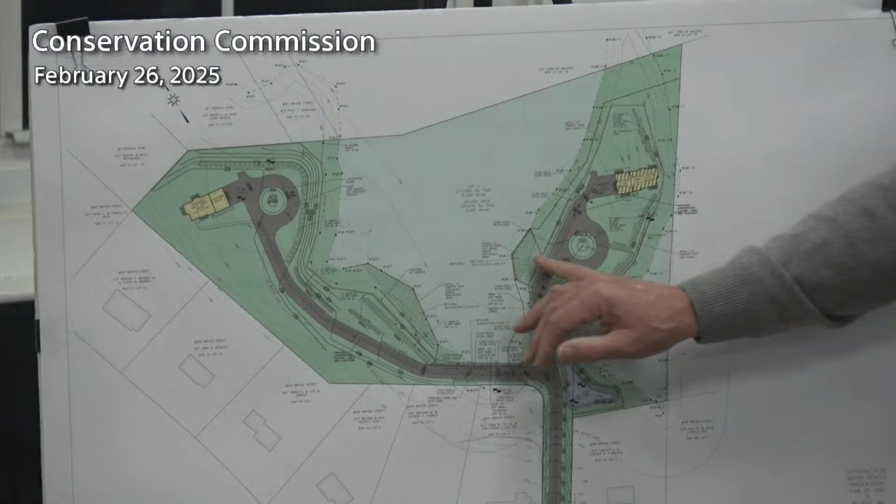There's about 950, a little less than 1,000 square feet of wetlands right here that is altered as part of this Lot 2 development. But both lots have replication areas right near the alteration area.

So I think that's about it. I think Landis might have a few comments for you, but whatever needs to be done, we intend to do it to get this approved.

Do you want to go over the new replication plan that you provided us? The plantings - yeah, I think we just added more plantings, right?

Do you want me to? I don't really get involved so much with the actual details of this stuff - other than telling the draftsman to put the plantings on in accordance with what the conservation agent recommended.

So that would be, unless you want me to start counting... No, it's just, what page is it on? A different sheet than you had before. We added a fourth sheet because there was a lot, so we added just a sheet devoted to construction period.

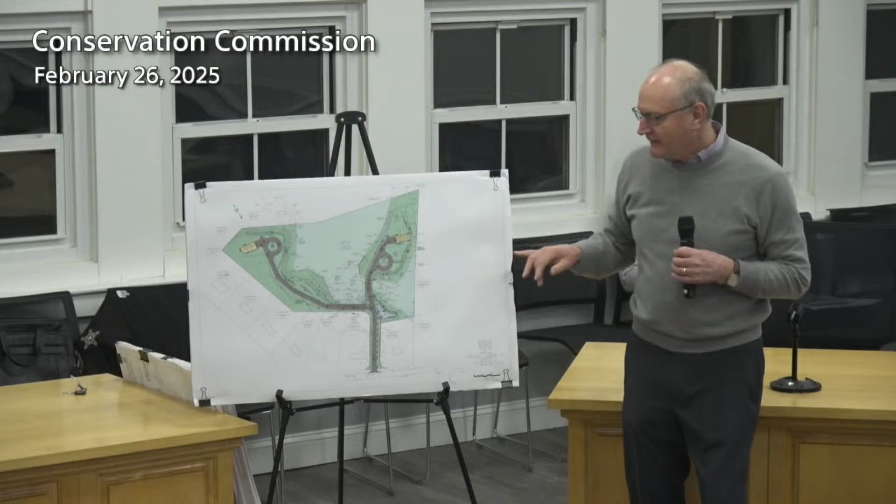So there is a blow-up of the replication area that shows all the plantings. Before it was sort of shown on this size, which really wasn't adequate.

I had asked, not the board, I had asked my guy a few times to just blow it up. There it is. So the one thing I'm going over it today, I was just curious,

the grades of the replication area - how far are they estimating? Well, it's being cut down and then it's level with the wetland area. There isn't a lot of difference in this area between the upland and the wetlands as far as the elevation goes.

So can you go to sheet 4? We're on sheet 4. I don't have sheet 4 colored up, but I have sheet 4 with me. Sheet 4 of the lot 1 plan. Yeah, and lot 2 - one or two.

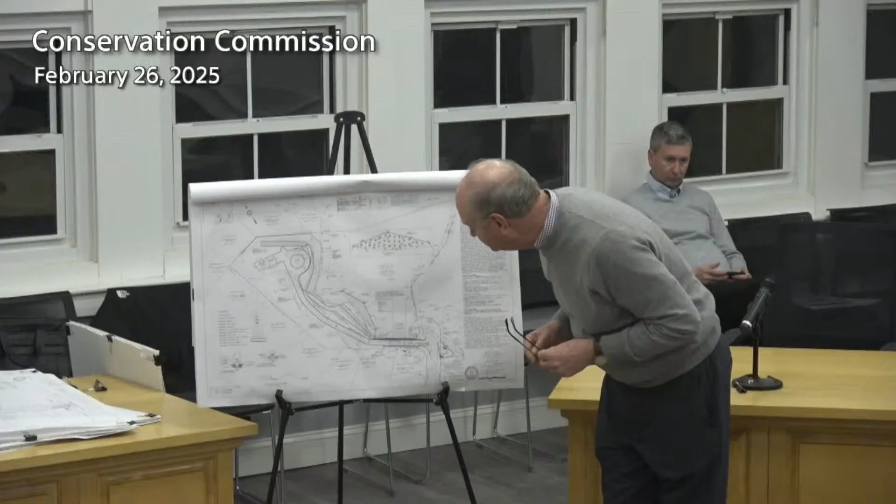Well, it should be 198, because that's where the wetlands are. Okay, well that wasn't clear to me, so you can add that. So if the final elevation is 198, then they need to excavate 6 to 8 inches below that, and then supplement those soils with the organic soils.

Right, you want them to take it down to the elevation of the abutting wetland, which essentially, if you look at it, it's following 198.

So it's gonna go 198 all the way to the 200 elevation? Or is it gonna grade, a gradual grade up to that? Or how is it gonna meet? No, it should be flat, 198, right across.

Right, because if you look at the wetland flags, they're all at the 198. A couple of them might be a little higher, maybe 199, but if you look at the contour in the wetland flags, they're essentially following the 198 contour. So that's what the replication area should be.

Okay, so it'll go 198 and then it'll go up to the 200. Yeah, it is, it's sloping up to where the driveway is and where the infiltration basins are, so it'll be sloping up.

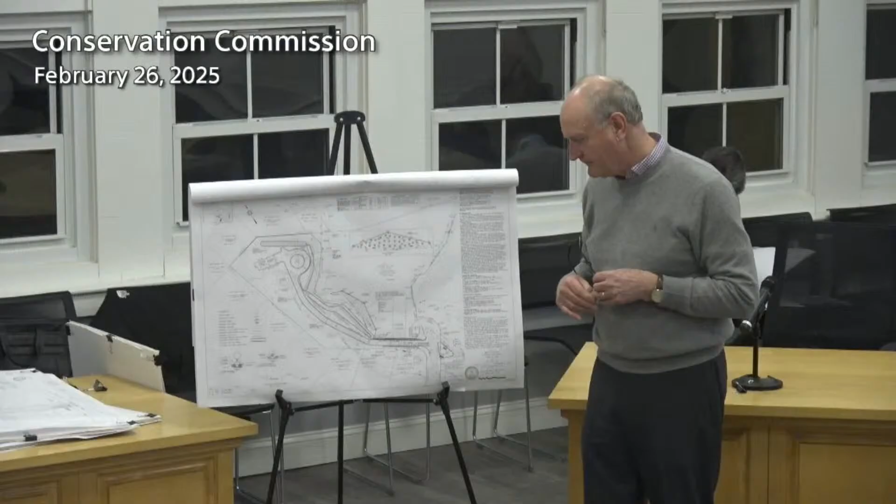The one that's in line with wetlands flag 22, yeah, and then the one in line with wetlands flag 20, again, I would just move up to the limit of work, erosion control. And then I would put a third one at...

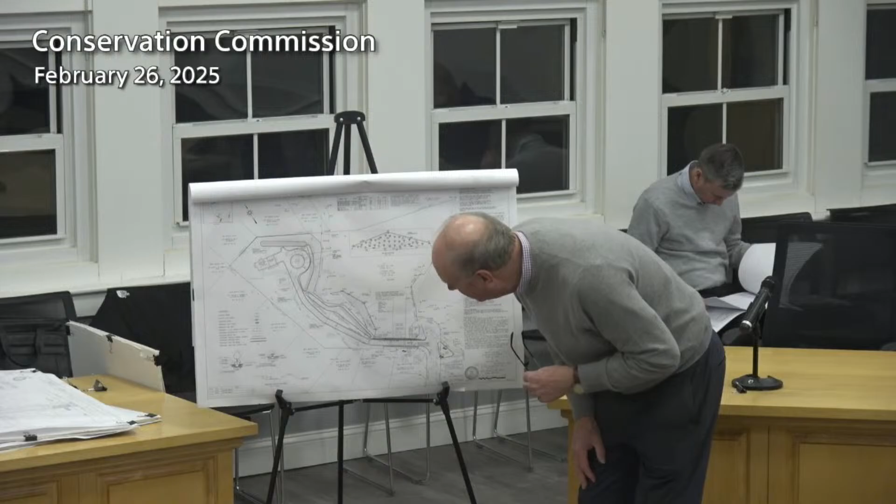Where the 3 erosion controls meet in the corner, near uphill, the wetland flag 19. I would put another one there.

Yeah, so we can put those all the way up to the edge of the infiltration basin, so they'd be sticking up a little bit right behind it, because that should be essentially the limit of... There's no reason to go beyond that.

Right, okay, that's fine. It's just they did need to be moved up. The other ones are fine, they're along the 25, but those, and add another one near the wall.

The other items in my report, the subdivision filing, I just suggested we do. There was one more plan change having to do with the replication areas. In the replication area notes, it says to excavate the material at the alteration areas and stockpile it for the replication areas.

I don't think I would do that, because there seemed to be invasives and junky vegetation out in the areas chosen for crossings, more so for lot 2. I think those soils should at least be evaluated prior to stockpiling and putting them in the replication area. If they have invasives, we don't want that in the replication area. Rather have clean soils there.

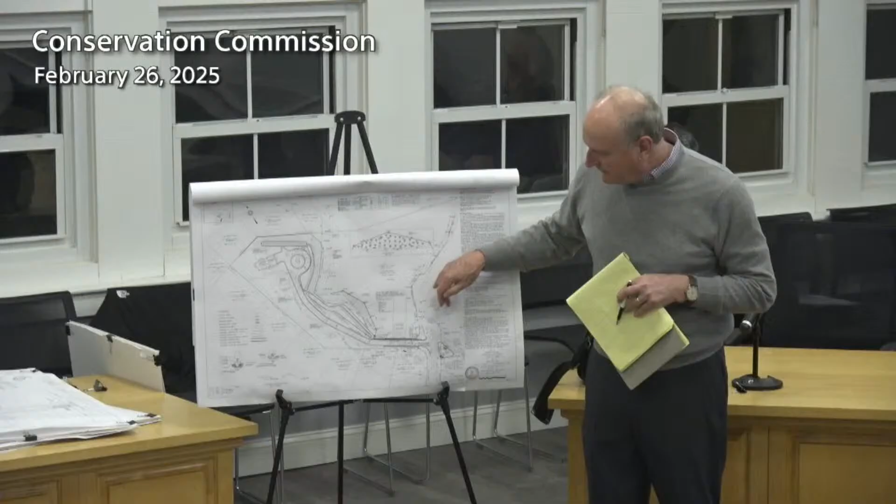Yes, I think each one will pump up to the intersection of the driveways, at the cul-de-sac, and then become just one line. That'll sort of be up to the town engineer. There's two ways to do it - one is just to connect them together at this point here, the other is to run them separately and let them go into the manhole here. I think it's gonna be like timing and how it works out.

Well, it's just whose responsibility for what? It's all private, so it would seem that it would be - they probably will be two lines. I would think that would be a better approach, so each one is responsible for their own line. The cost is negligible, just some extra pipe, but looking at the future, they're related now, but who knows who's gonna live there 20 years from now. So I think it would be reasonable to have separate sewer lines.

So I am meeting with the town engineer next week to go over the private developments for both documents, to make sure there's no contest in years from now about who owns what and who's responsible. But you're right, the easiest way to do that is just to have them as separate pipes until they get up to here, where it essentially goes into the gravity pipe - that would be part of the town's responsibility, because it's gonna be in the... yeah, but just to get there, I think it'll be better if they're separate.

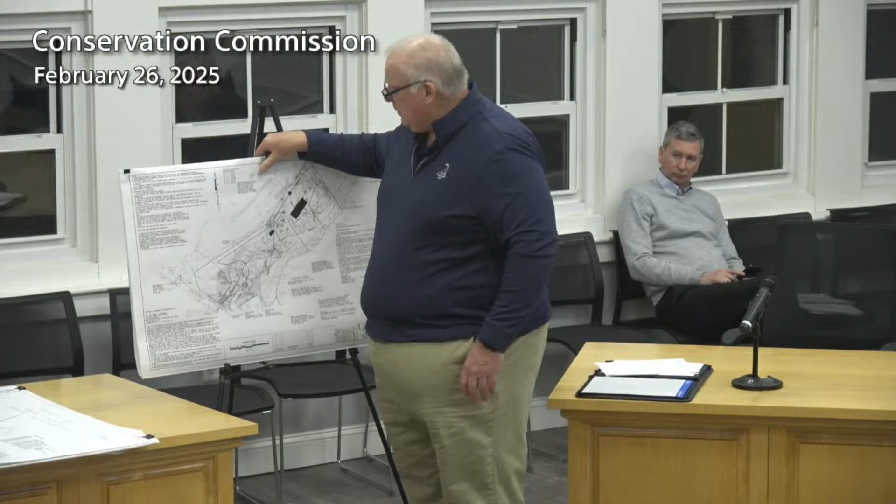We also have provided the commission with a revised set of plans that address all of the comments that were brought up from the Conservation Commission, the agent, and the fire department, planning board, et cetera. We are before the planning board as well for this project. We did receive a letter, an email from Landis outlining 4 items she was looking for. All seem very reasonable and pretty easy to address. I can go through them if you'd like, and indicate how we were planning to address them.

The first comment Landis had was on sheet 8, notes 1 and 2. She was requesting more detail as to how areas not worked for 7 days would be temporarily stabilized, and with what methods. The applicant would be proposing to use stump grindings generated from the site to stabilize those areas, or if appropriate, to loam and seed those areas. So we've added that note to number 2, and updated this so you can see where these notes would be added.

Additionally, Landis had requested that a note be added stating basins and swales will be as-built upon final grade and provided to the commission and town engineer for review. So we've added that note here, also highlighted in red to show where those two are.

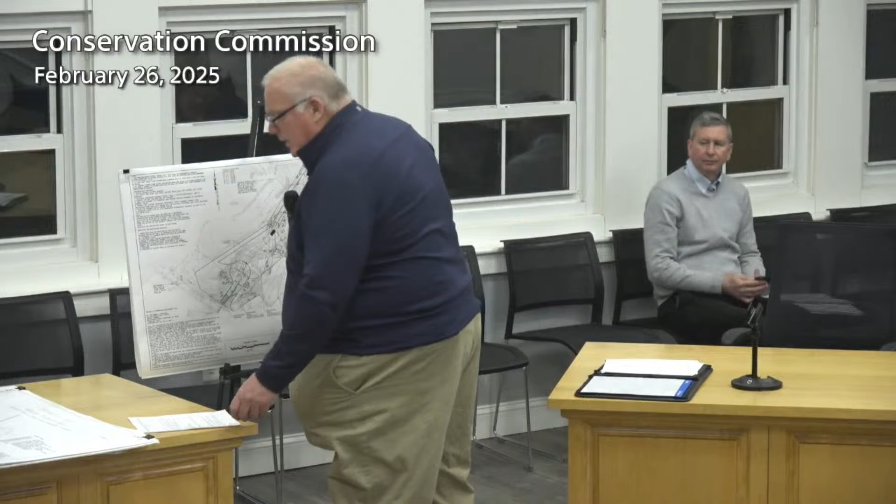Those areas are 8,700 plus square feet and 1,400 plus square feet. We did hatch them out on the plans, I believe on sheet 5. What I've done is add another viewport to sheet number 7 and carried over the planting schedule for both the street trees and the ground cover for this area.

I put a green line and a hatched out area showing where those two landscaping areas are, to hopefully clarify that. That hatched out area is on sheet 5, but it's black and kind of blends in. I also removed the proposed contours from this, so I think it's a little clearer.

So you're blocking out the areas, and you have a chart that shows the species and the amounts of what you're planting? Correct, we had that on sheet 5 of the plan set as well. We're basically proposing to plant 1 shrub for every 100 square feet of disturbance area, and we've provided a list of hazelnut, high bush blueberry, witch hazel, and sweet pepper bush. The area to be covered and seeded will use a New England Conservation and Wildlife mix.

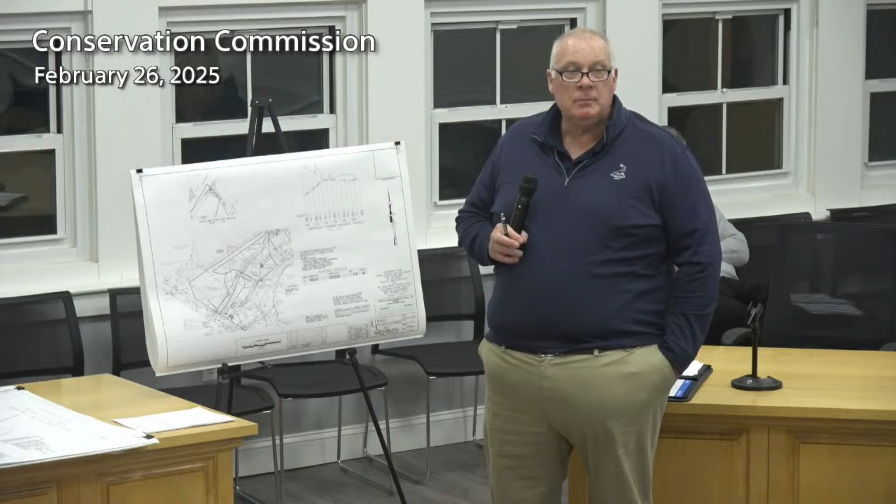I'll let the commissioners speak to that. I think, as I understand it, the purpose of cutting in the undisturbed riverfront area is to meet the grades of the driveway, correct? Yes.

And then you're doing these replantings to re-stabilize and naturalize it, but you're not planting any trees? We didn't propose any. If the commission would like to see some trees, I don't see that as an issue, but I'll let them speak on that. I think since you're taking trees down, you might want to plant some.

Okay, well he's already gone through my comments to you guys, so sorry to steal your thunder. No, that's okay, that's why I send them ahead of time. It was helpful for you guys. It was helpful, yeah.

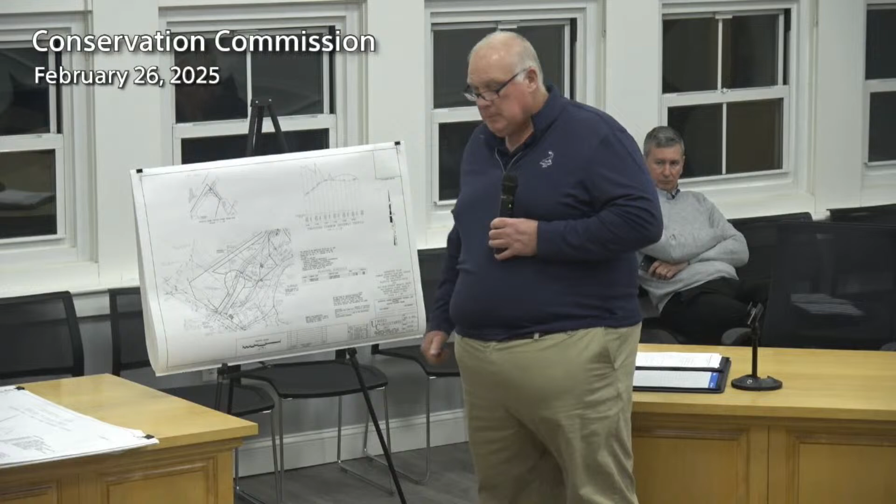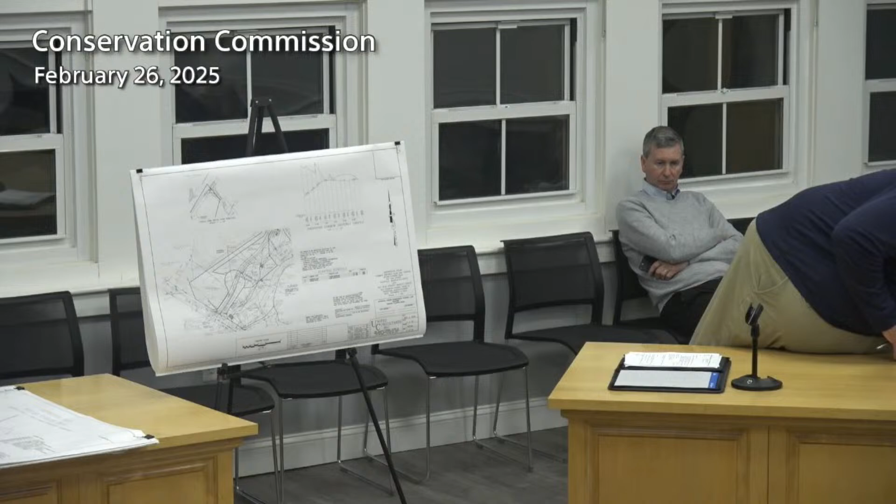Just to reiterate what was said earlier, I did go and walk the site, and it seemed like some of the driveway area looked a little fresher than 1996. So I went and looked at the aerials and sent them over as well. You could see a change from 2016, when it looked like just a one-car driveway, to April 2024, when it got widened quite a bit.

Because that happened after 1996, it wouldn't be considered degraded riverfront area, it would be considered an alteration. But I think, all in all, their amount of work in the riverfront area is below the 10%.

The total riverfront area on site they have is 98,860. So, take a little here, a little there, move things around to make the numbers work, but I think they met the regulations as far as that goes — it's really just the quality of the restoration that's in question.

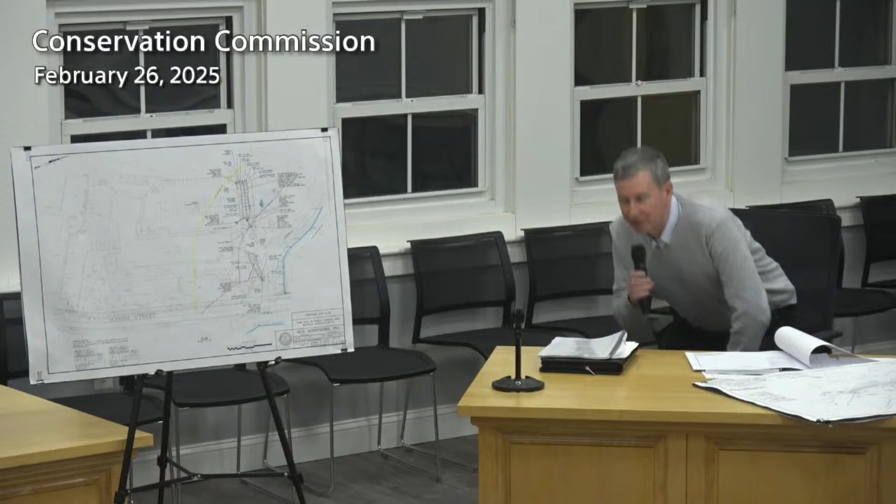So, nothing here to read in either? No. Okay, representing the applicant is Mike Carter, GCG Associates. Again, the applicant here is the town.

This project is another, as Landis indicated, stormwater improvement project. The project's really close - if you look out the window, it's right behind me.

Right now, the drainage for half of the building and this whole parking lot flows that way through a series of pipes under the ground and discharges right into the stream, the brook, directly. So the town wants to try to improve the treatment. The gutters on this inside building area also drain right in there directly.

With Carl and Landis, the town engineer, we looked at how we could treat the stormwater. We went through a couple versions and came up with the one that's before you tonight. In the big picture, what we're trying to do is treat the runoff before it gets to the stream, and remove 90% TSS and 90% phosphorus.

We have two different components of the project on the plans. The big thing I want to point out is there's a big tree down there that you probably all know, about 48 inches in diameter. We're not touching that. We took the canopy of it, drew a circle from the canopy using aerial mappings, to make sure none of our work occurs inside the canopy of the tree.

There's two different treatment devices we have. The one on the top right side of your sheet, these little squares, that's going to be an underground infiltration system. In the corner of the parking lot, there's a catch basin. We're going to remove that and put in a conventional 4-foot sump. It's an older catch basin that's been there as long as this building has been here.

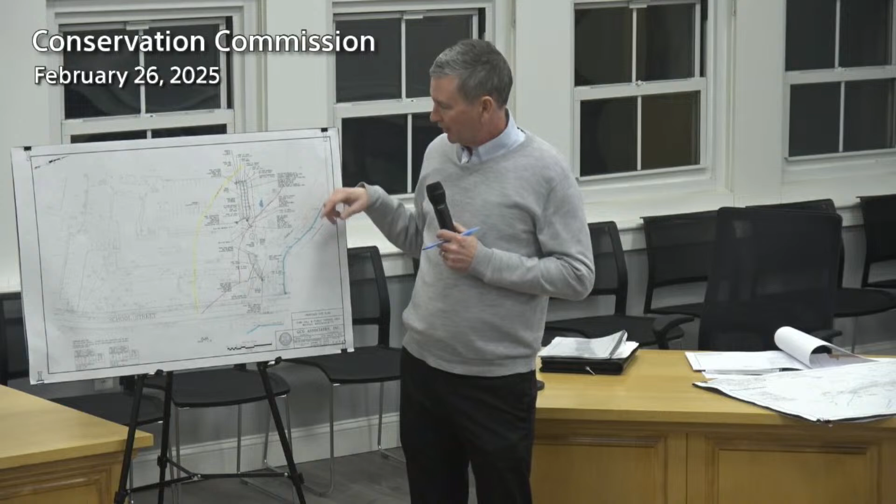Nothing inside the 25-foot no-alteration area. There is a floodplain here at elevation 139.5. If you look on the plan, you'll see we've identified the contour. We are not inside the floodplain. All the work is outside the floodplain.